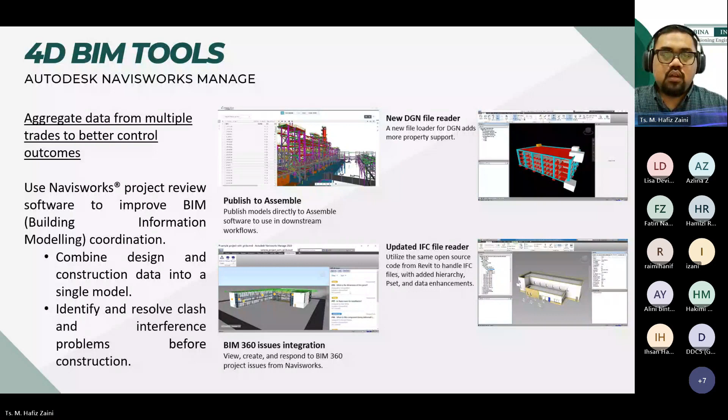So for the first feature in Navisworks, most common people know that Navisworks is used for clash detection. If I ask people in the industry, most of them are familiar with Navisworks for coordination. So they are able to detect the clash and also coordinate the model. They also have features to mark up all the issues, the clashes, and then send them to the respective stakeholders for their next action.

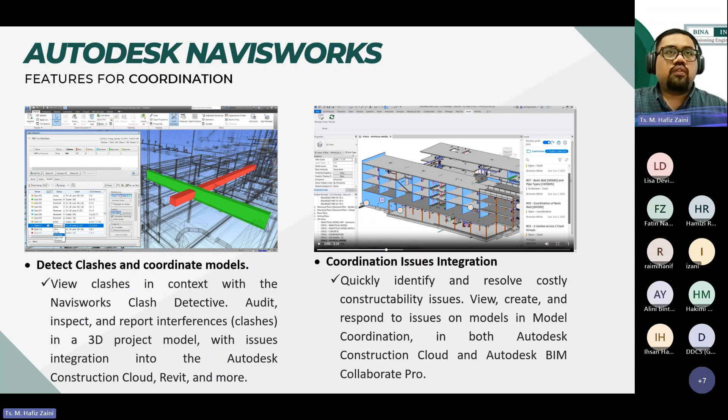So the other one is about coordination. As I mentioned earlier, they have the IFC file reader for coordination. Let's say our current project right now is one of the residential developments. The structural engineer is using Tekla, and our team and the architects are using Revit. So what we do is combine all their models, including the Tekla one, by using Navisworks to run the coordination. They also have 60 plus file formats that can be imported directly into Navisworks.

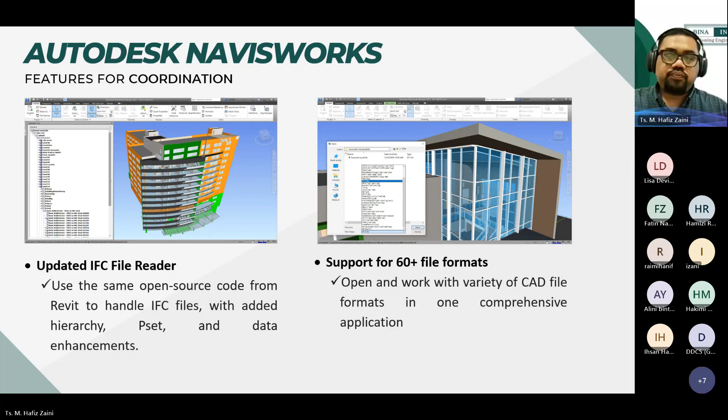Then the next one is about model review. Navisworks Manage requires purchasing a license. Some of the stakeholders will purchase the Autodesk bundle, which we call the AEC bundle. Inside the AEC bundle, they have AutoCAD, Revit, Navisworks, Civil 3D, InfraWorks, and also Navisworks Manage. So some stakeholders don't need to buy the license for Navisworks because you can use Navisworks Freedom, which is the free version of Navisworks Manage. Why is Freedom enough?

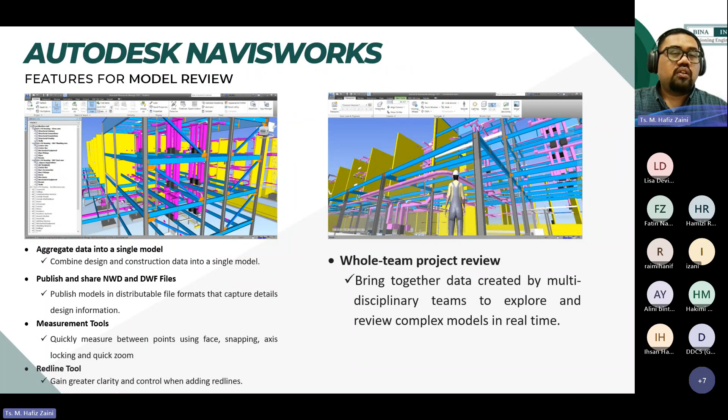Because that one is for model review. Some stakeholders are not required to see the 4D, they do not need to see how you run the clash detection. They just need to review the model, to see that all the clash issues have been resolved. From there they can make decisions faster through the model review. So the first is for clash detection and coordination, and now this is for model review.

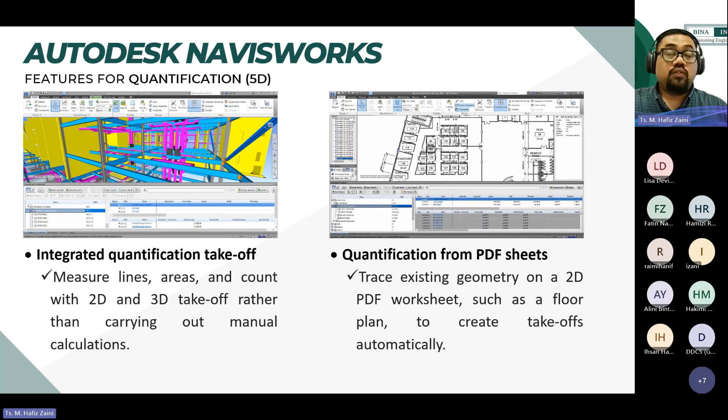Okay, so Navisworks is also one of the tools for quantification. Quantification is 5D, which means extracting the quantity of the 3D model elements. Normally what we do is use Revit to extract the schedule of quantity for the model elements. For example, in the architectural model, you want to know the quantity of doors, windows, and the area of finishes, so we can extract it from Revit. But Navisworks can also do this process. They extract the quantity, and then we can export it to Excel file, meaning .csv format in Excel.

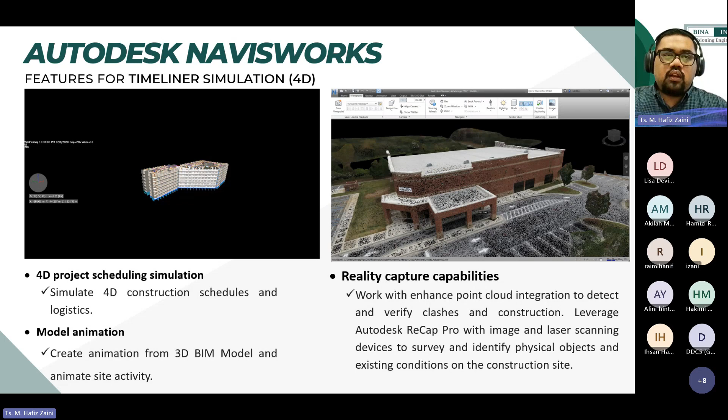Okay, then the next one is about the format. Navisworks has three types of format: NWC, NWF, and NWD. So what is the NWC? What is the NWF? And what is the NWD?

NWC is the cache file that we export from an editable model, let's say like Revit. So if you did the 3D model in Revit, you can export from Revit format to Navis format using .nwc, which means exporting to Navisworks. So that is the NWC, and normally it represents that element.

For example, on a high-rise project, our arrangement of files is based on the services. Let's say we have 12 services in that project, so basically we have 12 NWC files exported from the Revit model, because one NWC file represents one editable 3D model file. So that's what NWC is. Later on I will show a demo in Navisworks of what is the NWC, what is the NWF, and what is the NWD.

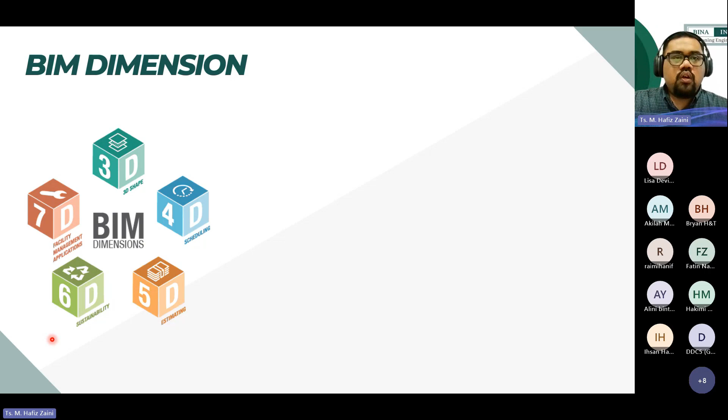So the dimension for 3D is basic, it's a 3D model. So it's modeling, it's correlation, it's parametric data. These 3D models are the fundamental, the foundation of BIM implementation. Inside this 3D you will incorporate the data of the models, the dimension, the shape, and all the things that you require to put in the 3D model. So when we go for collaboration, from this 3D model also we bring for collaboration.

So the next one is about the 4D. So what is the 4D? 4D is the combination between the 3D model and also the project planning, which means the construction schedule. So that is what we call 4D. The benefit we get is, number one, about time, scheduling, and also virtual construction. I will go into detail on the 4D after this.

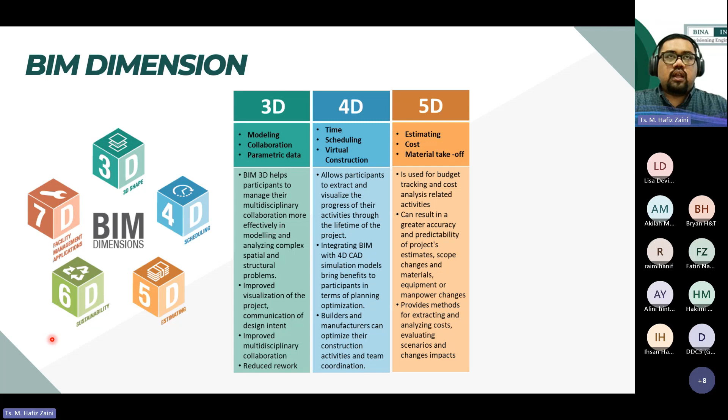So this one is 5D. Like I mentioned earlier, it's about estimating costs and material takeoff. I think anyone already aware, with knowledge about BIM, already knows that in the 3D model we can incorporate the data regarding costing, the cost of material, the cost of the element, the cost of equipment. As long as we have the data, we can incorporate it. Then when we do the schedule, when extracting the schedule of quantity, we can also bring all this costing data to the schedule itself.

6D is about what we call sustainability. Sustainability is about value engineering, engineering analysis, and the simulation of LEED. So that is the 6D. The engineering analysis, and the 7D is about facilities management or life cycle.

This facility management, which means if you are also aware about the level of development, like 100 to 500, so the 500 basically is the model for the 7D, which means the model itself is already developed, integrated with the as-built data, and it's good to be used for facility management.

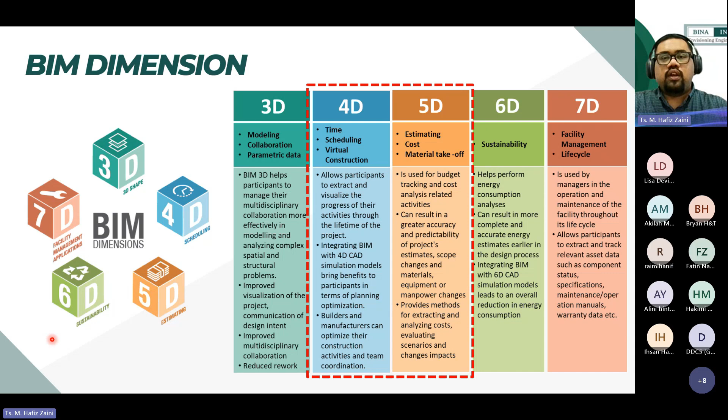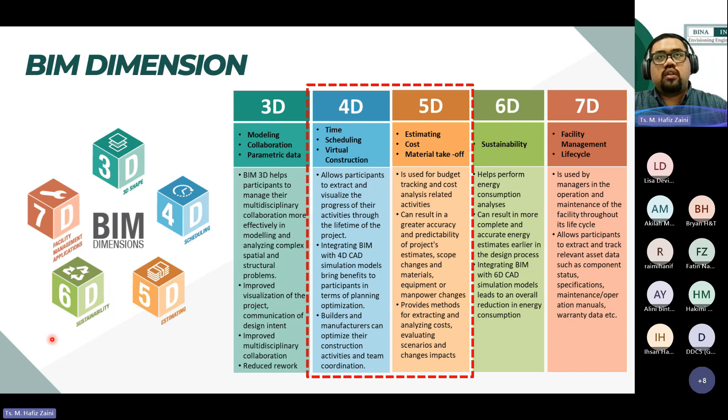But for today, we'd like to focus on the 4D, and also touch a bit about the 5D. So basically in the 4D we can also include the cost, the cost loaded based on the schedule.

Okay, so we go on the 4D BIM timeliner. I call it the 4D BIM. Some call it 4D scheduling, some call it the 4D timeliner, some call it the 4D schedule. It's related to time and scheduling.

So what is the 4D simulation? Basically, you have the 3D model and you also have the project timeline, which is created by the project planner. This schedule will be integrated with the 3D model, and the result is the 4D. It's the extension of traditional 3D BIM, which adds the element of time as the fourth dimension.

Basically, the model not only represents the physical characteristics but also incorporates the element of time to visualize and simulate the construction process over the project life cycle. Normally the 4D simulation exercise will be done during the construction progress, because they want to simulate the construction process over the project life cycle.

So basically when we're creating the 4D BIM, it allows us to integrate the model with the schedule or construction planning, and also show the simulation between plan versus actual.

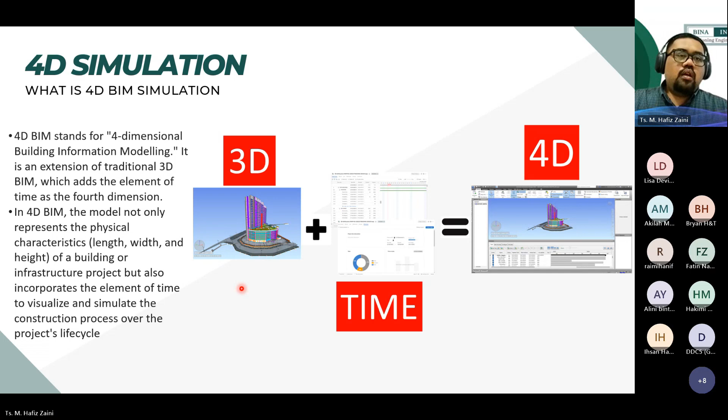This is a common tool used in Malaysia. Today I'll be focusing on the product Navisworks Manage. There's also Synchro 4D, Asta Powerproject, and Fuzor. All these tools are commonly used in Malaysia.

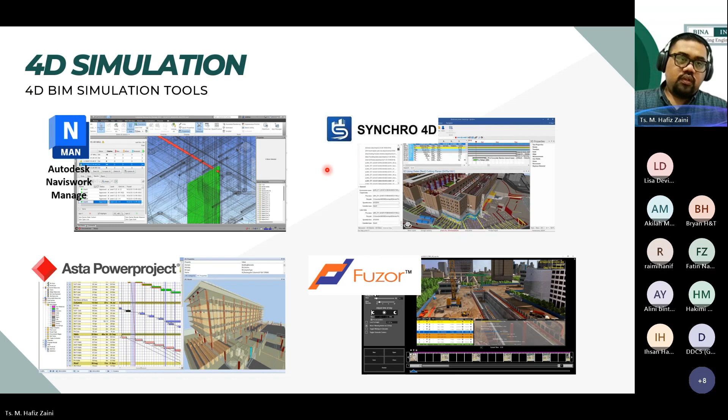So we go on to the types of 4D BIM simulation. Type number one is the site logistic model. Basically you can use 4D BIM simulation as one of the 3D model types, and it can be used in the project timeline simulation. You're also allowed to plan the clear work areas with trade overlap.

You can also associate it with on-site material storage coordination. From this exercise, we raise site coordination in a 3D form and create improved awareness and communication.

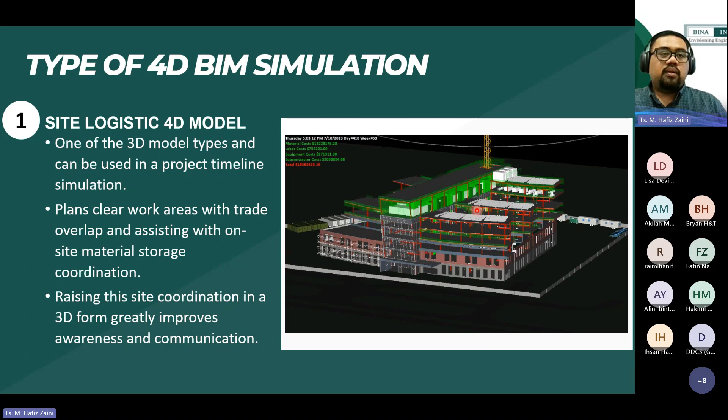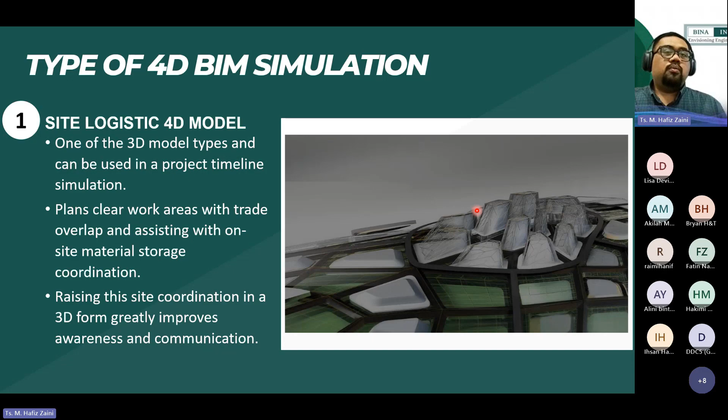So basically we're using the 4D BIM for site logistics, so you can see the simulation - for example, if the project uses IBS, we can use 4D to simulate how the panel will be delivered on site, how the tower crane will lift the panel, transport it to the designated area, how the panel will be lowered down and installed. This simulation can be done using 4D BIM.

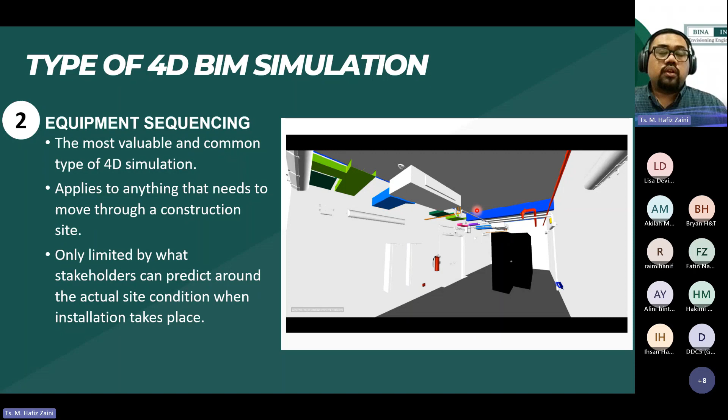Later on I will show a sample comparing the actual versus plan.

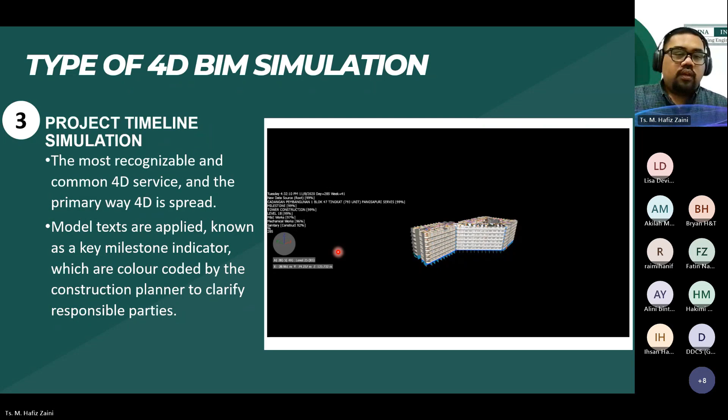Okay, so I will proceed to explain basically how we did the 4D. First we need the 3D model.

This process is created because our environment uses the Autodesk product and also Microsoft Project. So the 3D model basically will be created individually, either as Revit .rvt or Civil 3D .dwg.

Then from this 3D model, as I mentioned earlier, we export the 3D model to the NWC format. Then from the NWC format, we bring it into Navisworks, where we combine the models - we call it append. Later on I will show the function of append.

Then this one is the data from the MS Project. So this one, the data for the project timeline, we pull from MS Project. The format should be either .mpp or .mpx. You need to create the project schedule, the timeline, and also the activities based on the element.

So the best way to execute this process is that the activities in the planning should tally with the element in the 3D model. Some of the model, like for example temporary works, temporary features, are not created, but basically can be hidden using Navisworks - all the activities that are temporary.

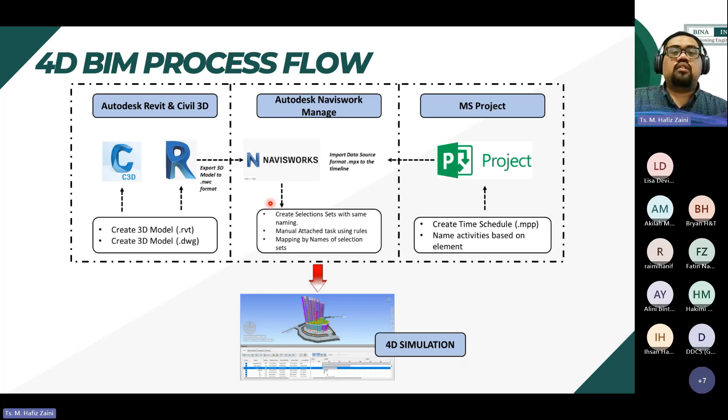Okay, so the process I showed is very high level. This one is the detailed one, so as you can see, are we using the magnifying glass here?

So this one, as you can see, we're preparing the model. In the model here, you see that we export the model to the NWC, and then this project schedule - basically this one, I'm using Gantt Pro. So Gantt Pro defines the project, then after that we link the schedule to the 3D model.

So by using append - I mentioned here is the append. So here is your NWC file, and here is the append. And then after that, we do the assign time parameters, what we call the mapping. So here is your NWC file with the 3D model element.

So here is the schedule, the time from the schedule, and then here we attach. So every activity here will be attached to the 3D model element. We will do it by activities - they have a few ways to do it.

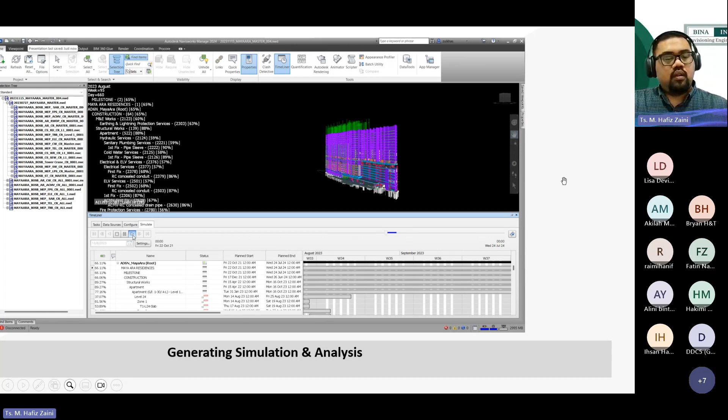So after we do the mapping, we will do the simulation. So as mentioned, the simulation - basically this one, if you see the element like this, it's already complete, done. The green one represents the work in progress. You can see here on the left all the activity, for example the construction works, and also the percentage here. So here basically is the NWC file. Okay, so that is how basically we do it at a high level.

So what is the value that can be gotten by implementing this 4D BIM? Number one is to improve time - to improve the pre-construction project planning and construction sequencing, optimize workflow, reduce idling time, and improve project efficiency. So it can improve the time.

So this data, how I got it, is from local data like the CIDB report. The value of the 4D BIM shown there is not so much, but it shows that it's improving their process. But most of this data I got from the Autodesk Construction report and also the McGraw Hill report. So I summarized all these reports, and here is the value of the 4D.

The next one is about reducing cost and waste. So basically this 4D can help to minimize abortive work, improve progress tracking, visualize the real-time progress, optimize resources, and promote more sustainability on the environment.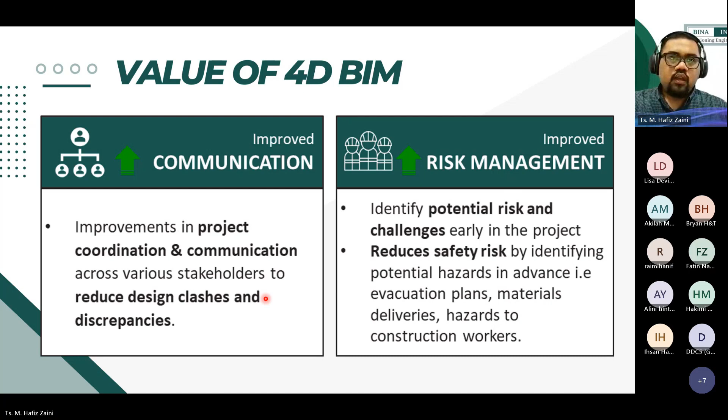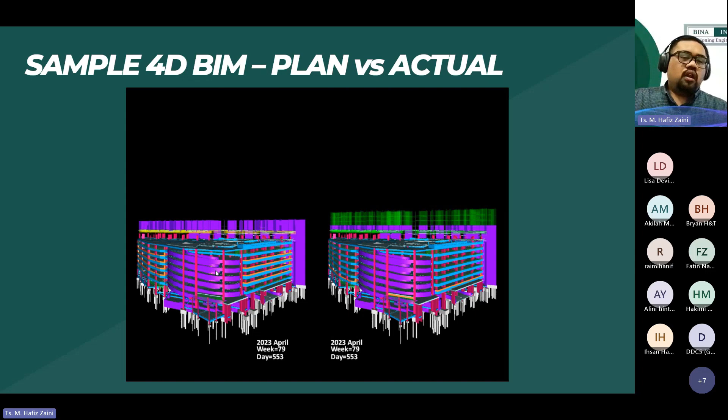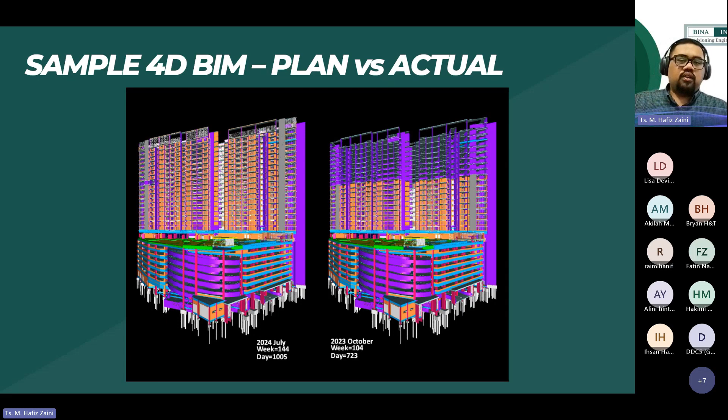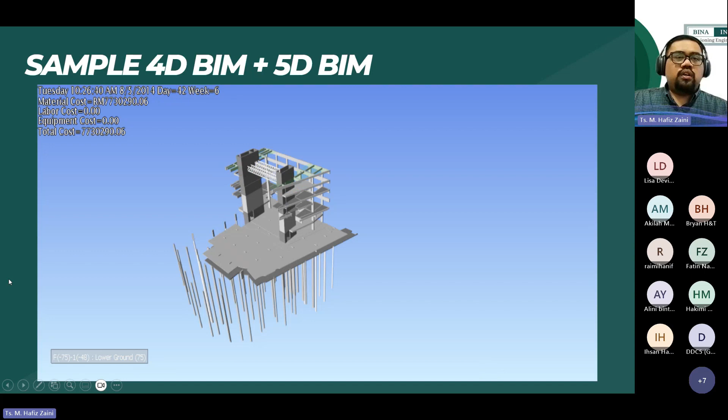So let's say if I continue and I stop here, in week 6, you can see what is the cost that is already spent on the project. I believe that in the schedule, like in Primavera P6, you can load the cost of the project too. So that data we also get from the planner and incorporate into the model, then we do the simulation like this.

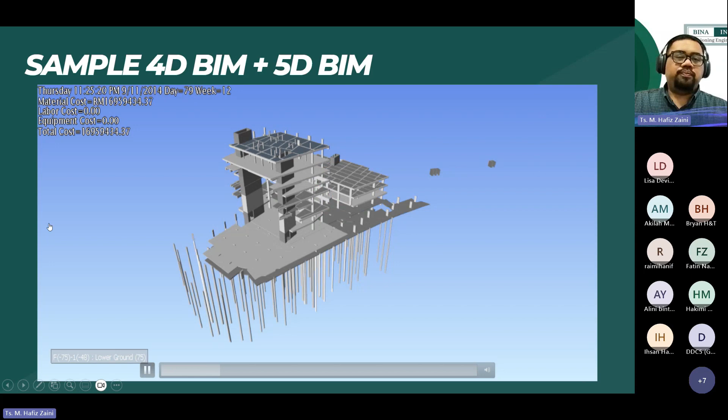So all this is progressing by element. This element or the 3D model simulation is based on the project planning activities. You can see the material cost, and you can also put the labor, the equipment, the material — so this is all the cost.

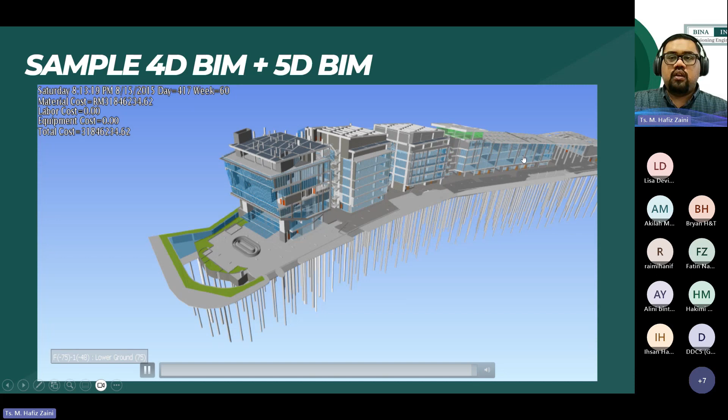So you see the green one is what we call work in progress. Once they complete the work, the element will turn into the solid model like this. Once it's completed, we move on. So that's for the 4D and also the 5D. And the next one is about the sequencing.

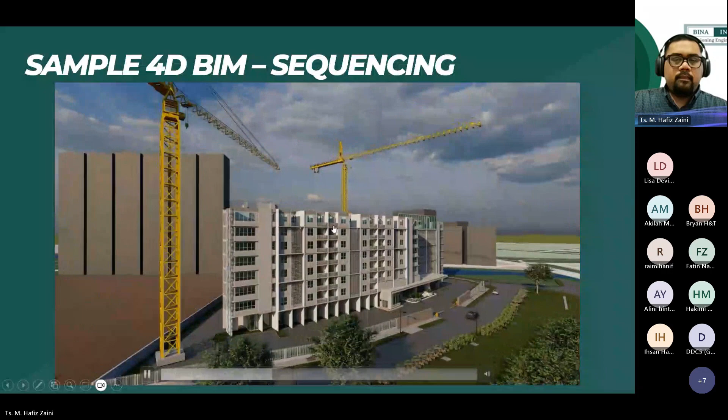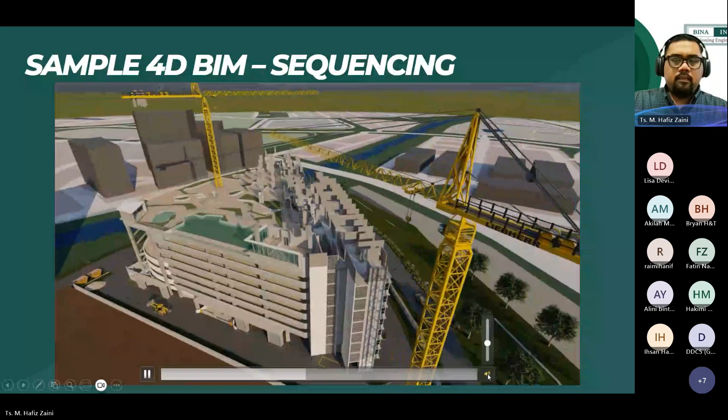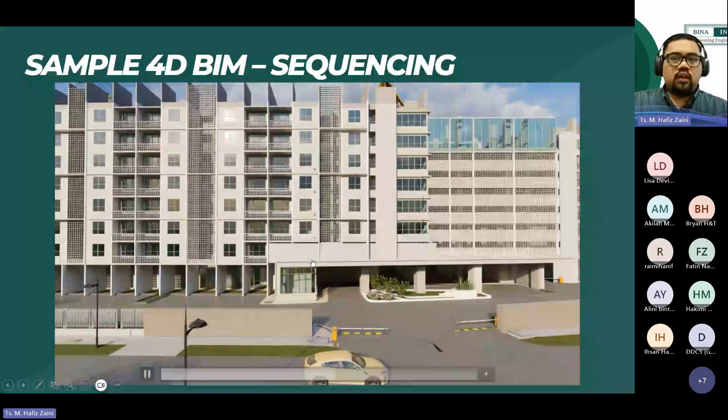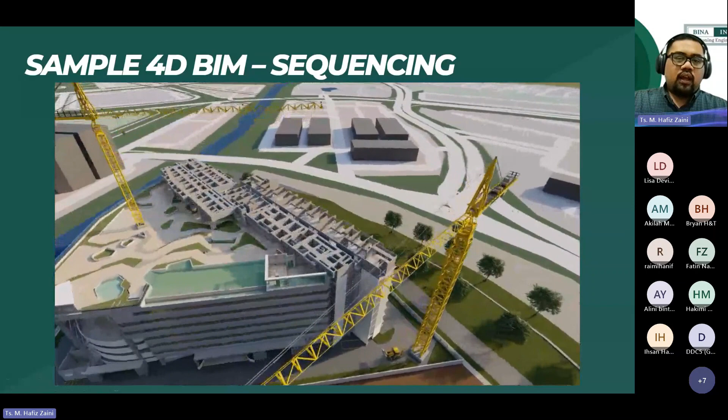Like I mentioned earlier, the 4D can be used for sequencing. For example, this one shows the sequencing of the elements. This project is using IBS, so we do the sequencing for one floor, showing the elements to be installed and everything in sequence. You can see here all the panels going down, then the finishes.

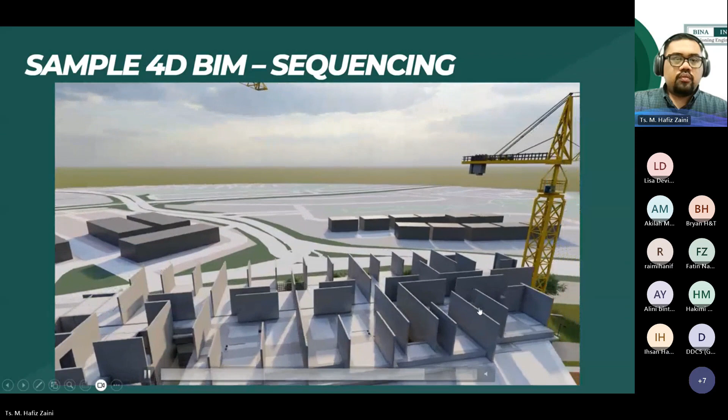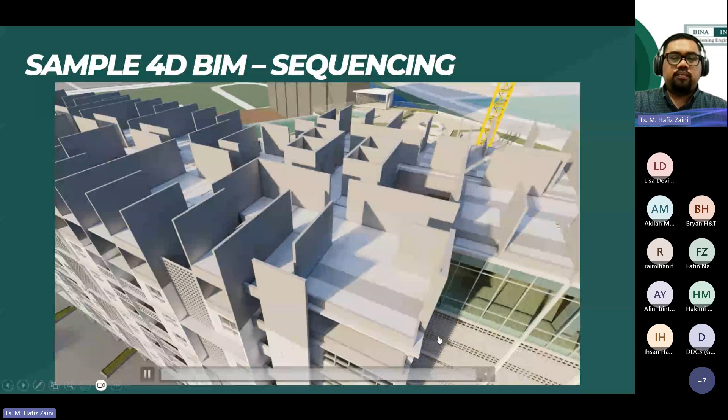As you can see here, one unit of the sequencing — all the elements, then after that, including the finishes — that's for the sequencing. Like I mentioned earlier, if you need further presentation or more detail, you may screenshot this snapshot. The person you may contact can arrange a presentation on the detail of the 4D.

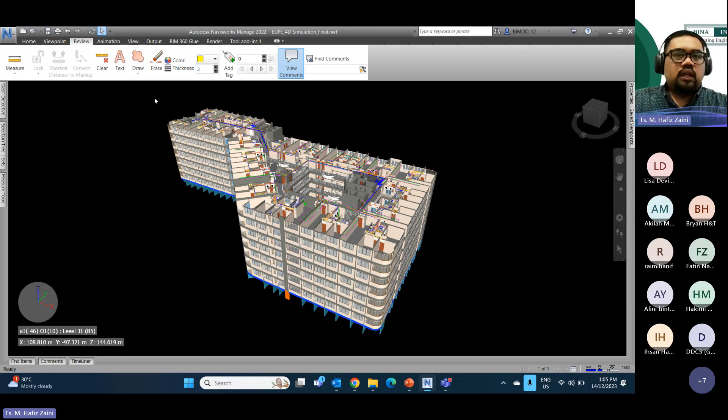Like I mentioned earlier, what is Navisworks? This is a demo about Navisworks. Anyone with experience in Navisworks knows the interface is very straightforward — there's home, viewpoint, review, animation. This one is for the clouding, if you want to cloud the issues. And then here you have your viewpoints, and here are the properties.

The properties — for example, you create one item here, and in the properties we build what is the issue, what is the item. And then here is what I call the selection tree.

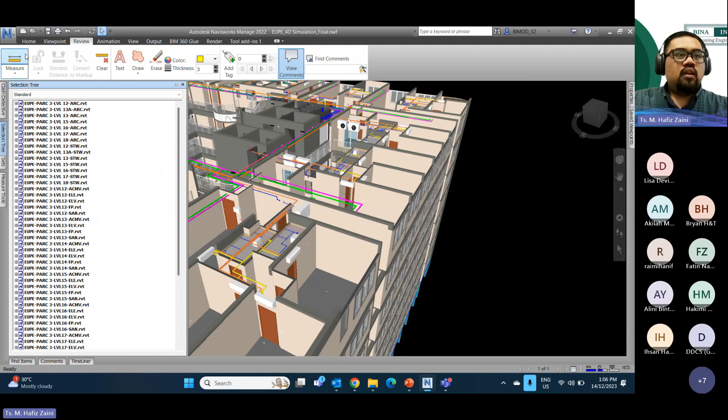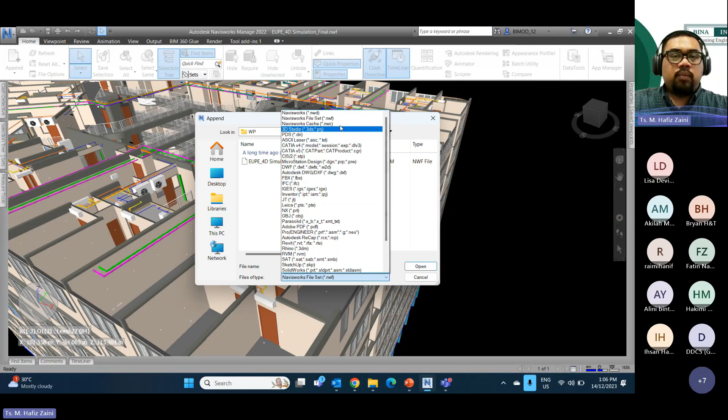And then the home — when I mentioned append, here is the append. You need to append all the files in the NWC. Navisworks supports almost 60 plus file formats — 3DS, laser scanning, CATIA, MicroStation, FBX, IFC, Inventor, Leica, OBJ format, Rhino, even SketchUp, and SmartPlant 3D. All these file formats you can export. So append means to combine all the NWC files here.

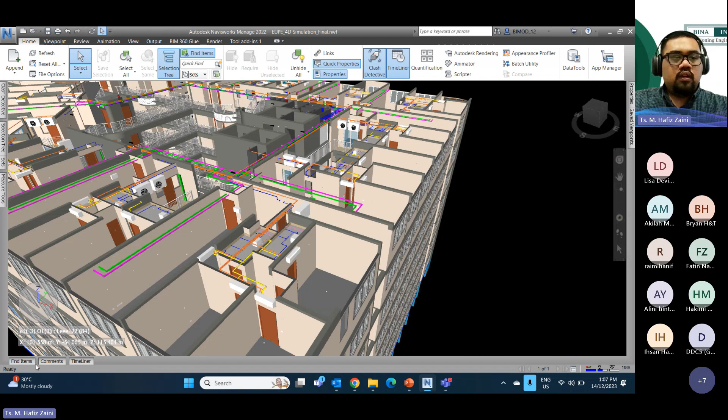So this one is what we call the NWC file. Then for the 4D, basically the 4D is here, it's a timeliner — we call it timeliner. The timeliner here, as you can see, has task, data source, configure, and simulate.

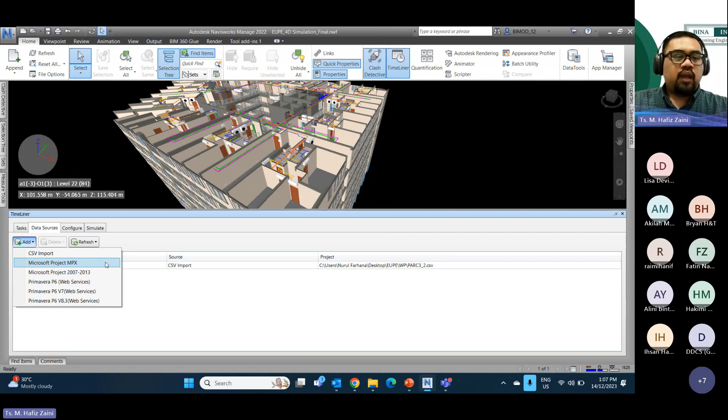Okay, so the task here basically is the activities, so how the activities I create. So like this project, I'm using the CSV as a file. So I'm using data source, so we can add the schedule file directly to the Navisworks, either in the CSV, MPX, or P6.

So once you export the file, basically all the activities will be here. As you can see here, basically they have the status. This one plan, so plan activities, plan start and plan end. And this one is the actual start and the actual end.

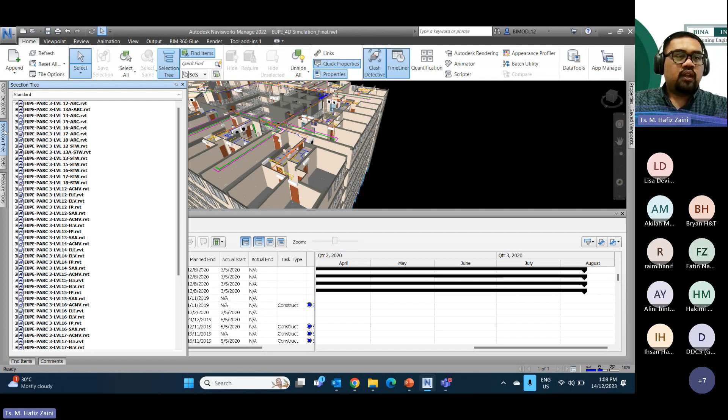So basically at the first process, the BIM coordinator will mapping by using the plan start and the plan end to the 3D model element. And then after that, from week to week, they need to update here basically the actual start and the actual end.

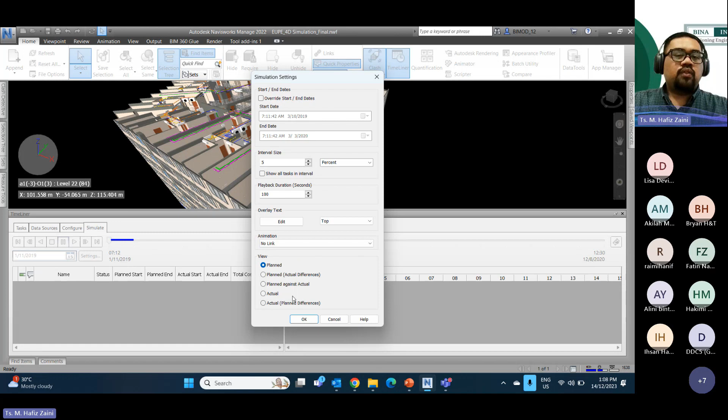So from there you can see all the, let's say if we go on the simulate here, basically if we go on the setting here, they have the view: plan actual different, plan against actual, and actual plan different. So basically when we go plan versus actual, they will appear like in a few colors.

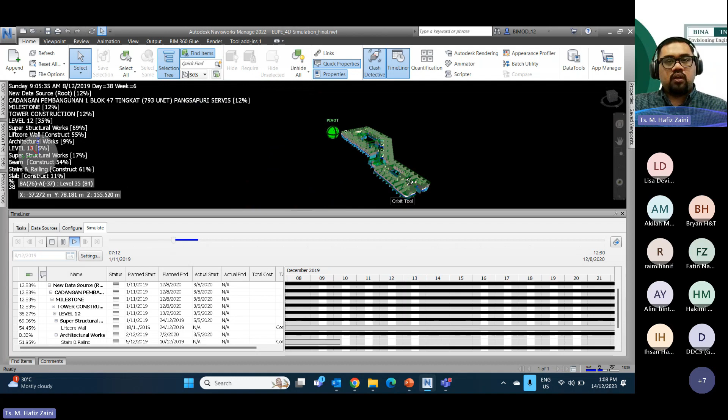So like this one, if I do the simulate. So as mentioned, here is the timeline, here is the activities, here you can see all the progress. So basically during the simulation, you can see the model, you can move the model, you can walk through, you can zoom in, you can zoom out.

Even you can see that, okay, this one, for example, you pause, then you can see that, okay for example here in week 9, where the progress should be done. So basically if we do the actual versus plan, we have two colors: one is the green color and one is the red color.